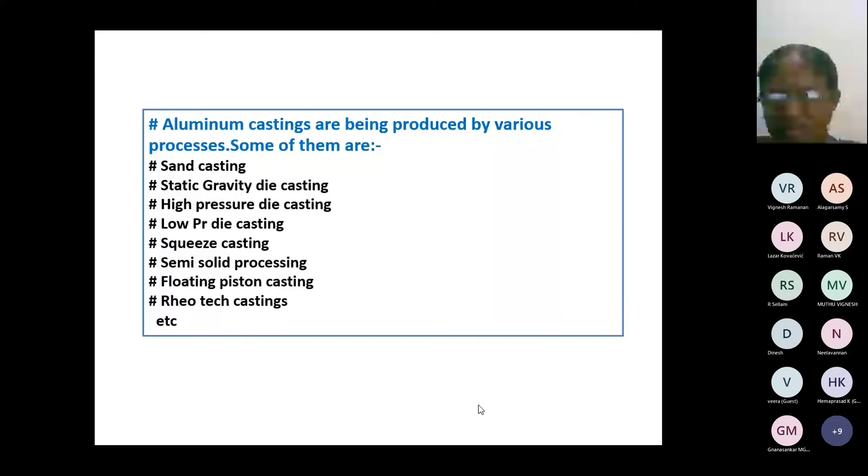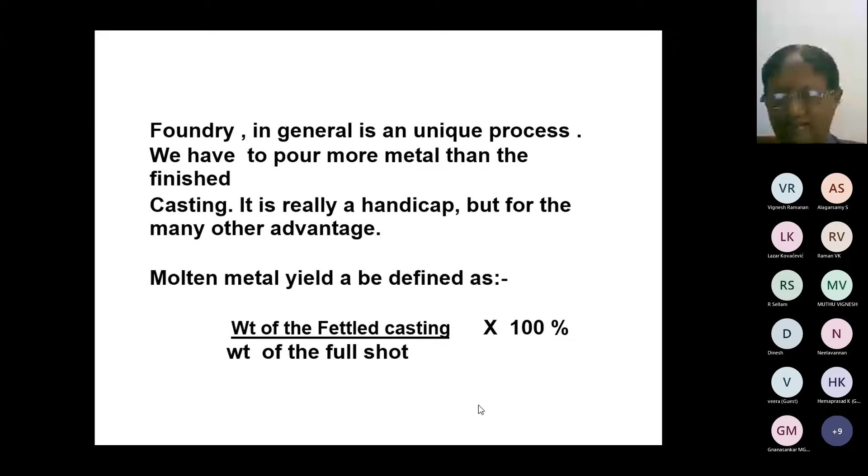Foundry in general is a unique process. We have to pour more metal than the finished casting. It is really a handicap, but for the many other advantages. Molten metal yield can be defined as the weight of the fettled casting divided by the weight of the full shot, multiplied by 100%. This is a measuring way.

In sand casting, you can get a maximum yield ranging from 30 to 40% only, and GDC from 45 to 55%, and tilting gravity can go sometimes up to 65.

Normally it is around 55, 60, and high pressure also is the same range, 60, 65 only, and low pressure is quite good, 90, 95 also possible. Squeeze casting is also more than that, and floating piston casting process, a proprietary process by Hyundai, achieved even 95% - I have seen it with my own eyes. The semi-solid process also gives about 90, 98% yield, but that is not popular in India. There is one other casting developed by General Motors USA, riserless low pressure die casting, where you get 100% yield - there is no riser at all. Such advancements are going on.

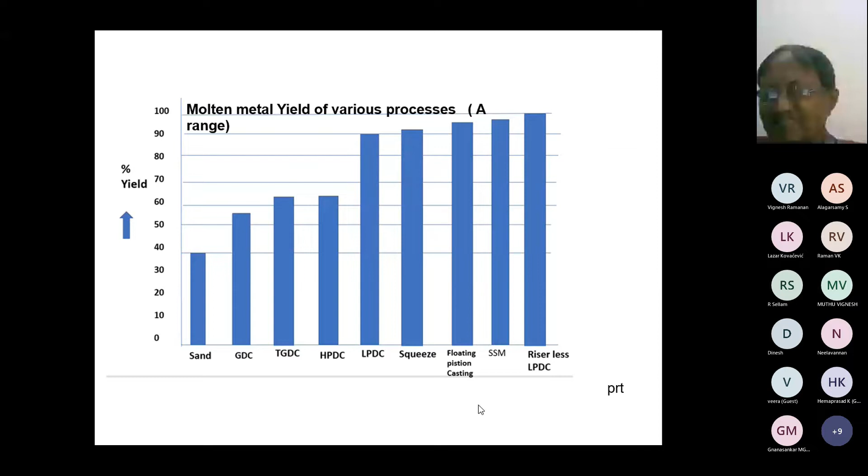In India, the most popular processes are GDC, HPDC, and tilting gravity only, and sometimes there is low pressure also. So I will take some case studies to illustrate.

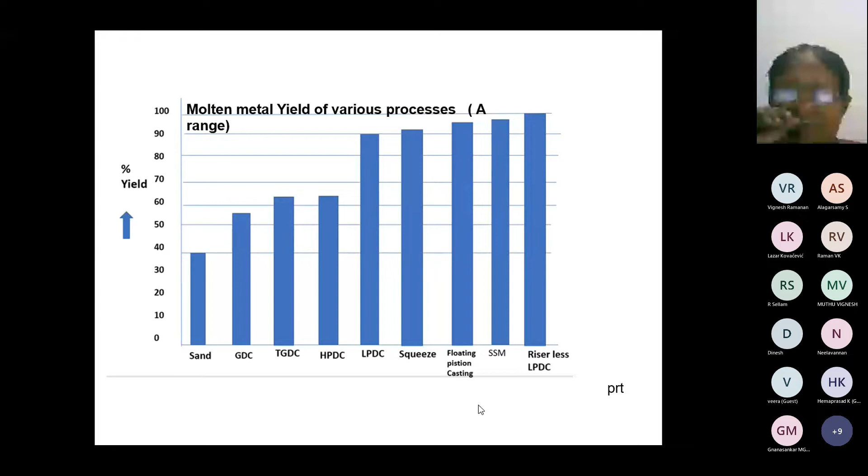What are the guidelines for improving the molten metal yield?

Attempt to avoid bottom gating and side gating as far as possible, since the risers become too cold and more volume of risers are needed for maintaining the same amount of feeding. Always try to use top gating, in which risers are always hot and the volume of risers can be a little less. Always attempt to use the tilting gravity process, in which the riser and runner are one and the same - you don't have to have a separate riser and runner, both are the same.

Attempt to provide core holes wherever possible in the casting to reduce the section thickness. Feeders could be avoided. Try to use high insulating die coating on the riser cavity to keep the risers hot with reduced volume. These are some of the guidelines which will help us reduce the amount of metal poured.

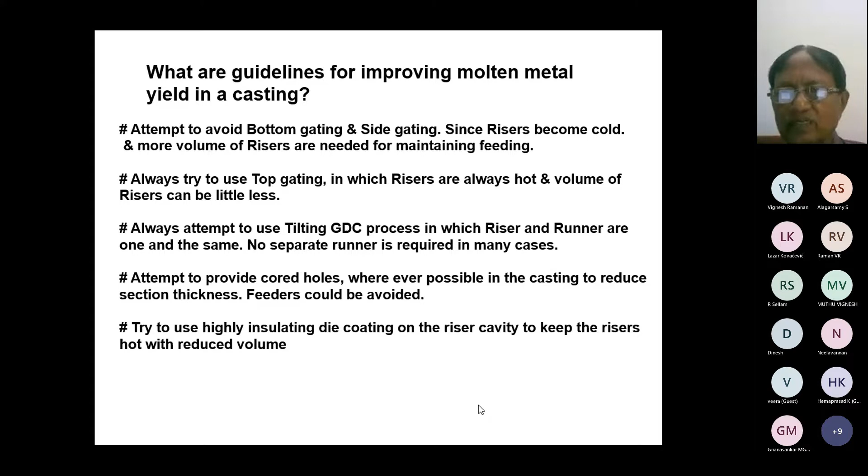Let us try to apply the guidelines and make yield improvements. I will give three case studies: one is cylinder casting, end cover casting, and lever housing casting. Of course, there are many more.

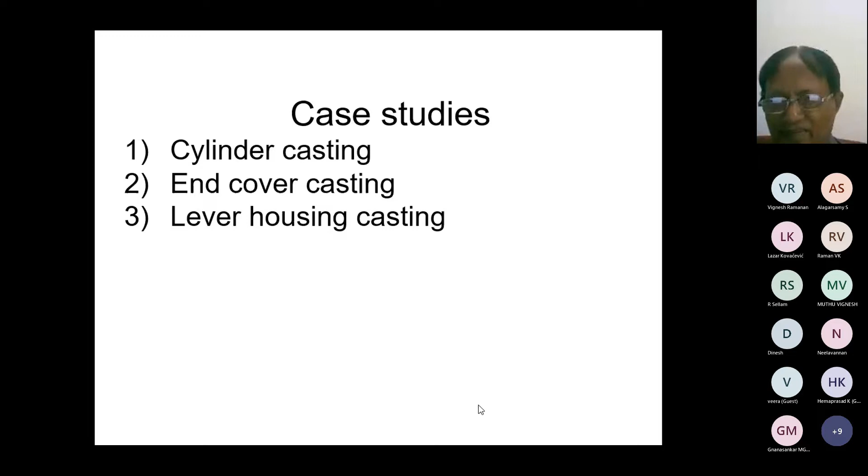Cylinder casting - this is the casting background. The shot weight was 7.2 kgs, and the fettled weight was about 3.2 kgs, and percentage yield was only 44.4%. Aluminum alloy specified is LM4, with silicon content 4 to 6%, a hypoeutectic alloy. Pressure tightness of 10 bar is mandatory. No shot blasting is specified. No aesthetic requirements. This is an under chassis casting.

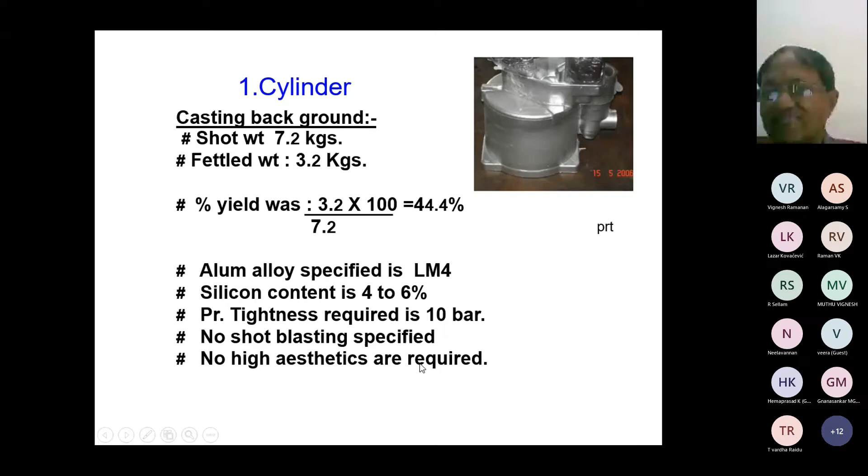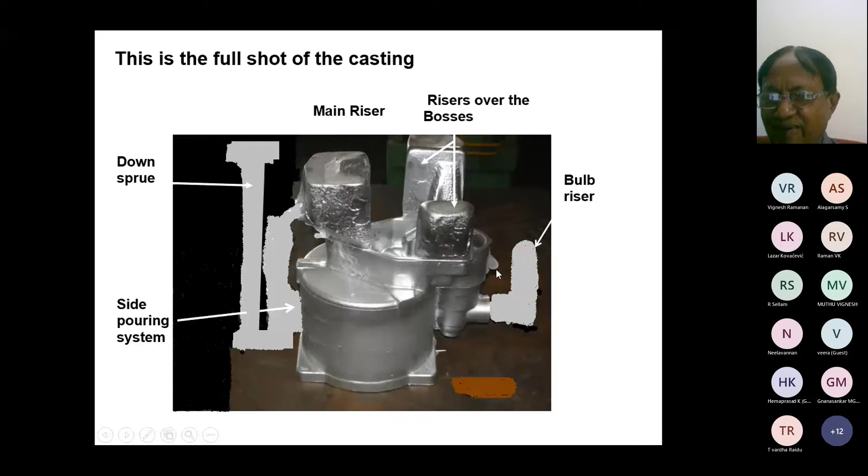A big static GDC die was made to produce these castings, and the casting quality was excellent - the die was running very well. But the yield was only 44.4%, which is very low.

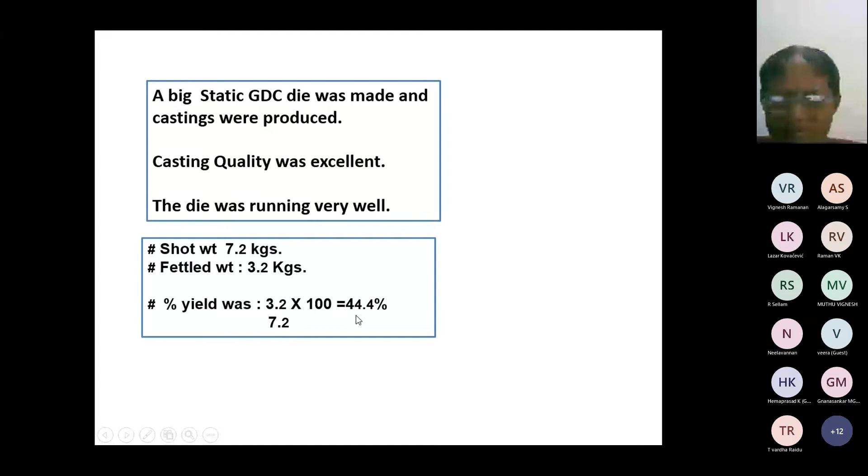This is the full shot. There are 5 risers and runners that had to be cut - you have to cut here, then here, and here, and linish and make it even. Such a lot of fettling work is also there.

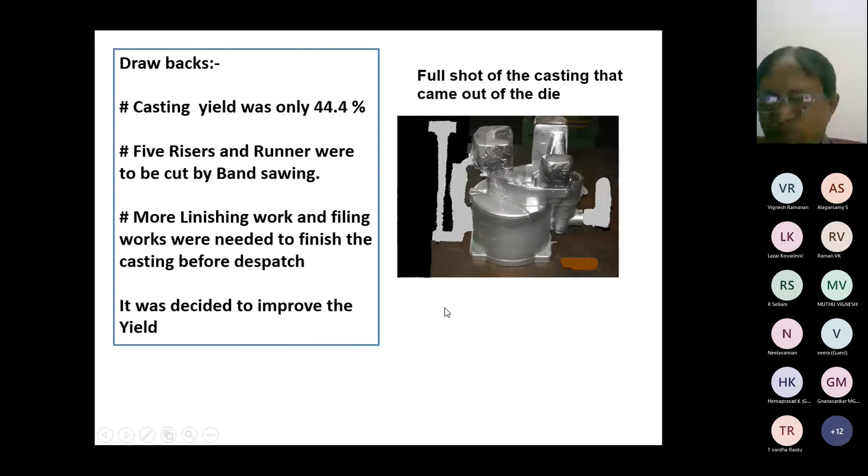It was decided to make improvements in the yield of the casting and also reduce the fettling work. We are thinking a lot. Let us see how the yield was improved in stages with the help of the guidelines - I will cite examples as we go.

First, we try to apply one rule: reduce the metal weight, or try to provide a core hole wherever required. See, this is a heavy boss of 32 mm diameter, which was tapped to M24 for being tapped on this. Supposing if you want to remove this riser, which weighs about 600 grams, we can attempt to core this and see - we did that.

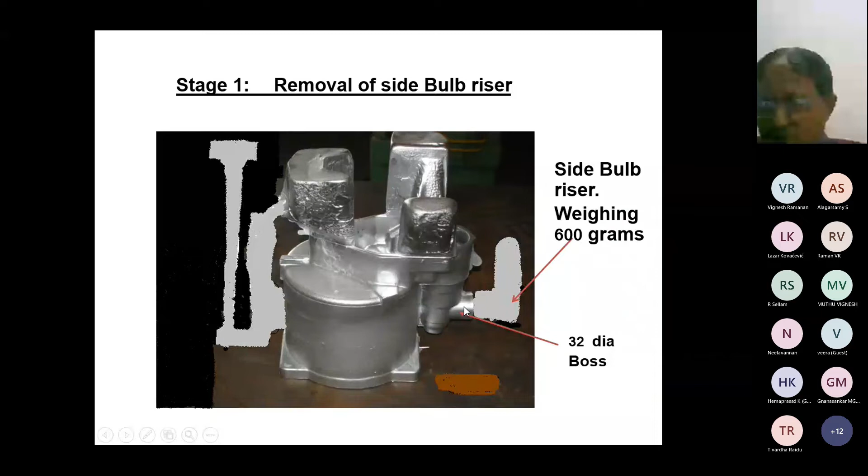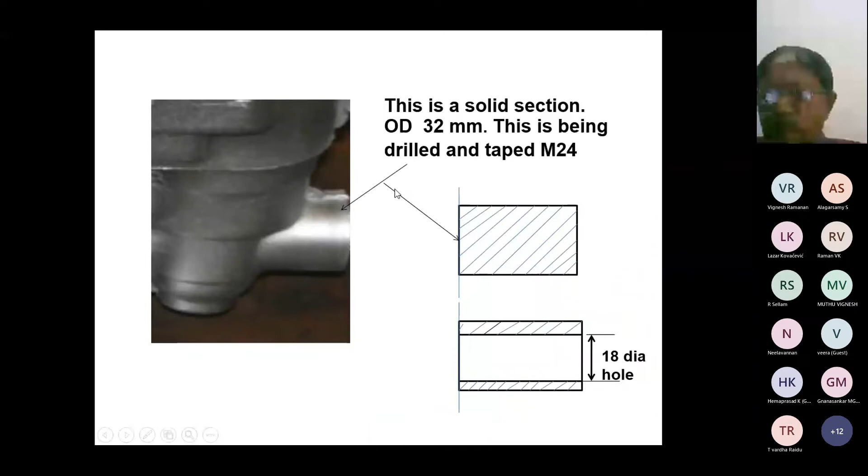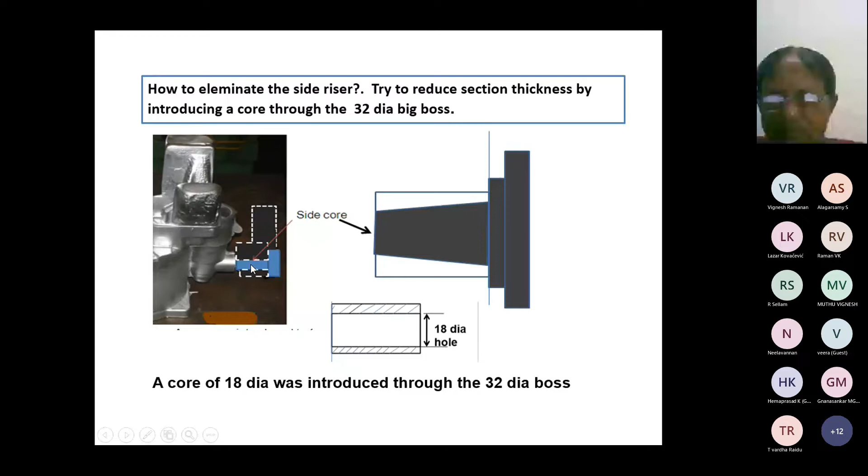We have provided a core hole of 18 mm diameter through this, say 32 mm OD. This is the die, this is the one, this is the core - we try to put it in by modifying the die. Eighteen diameter to a length of about 40 mm is quite a good material removal, and we try to pour some castings.

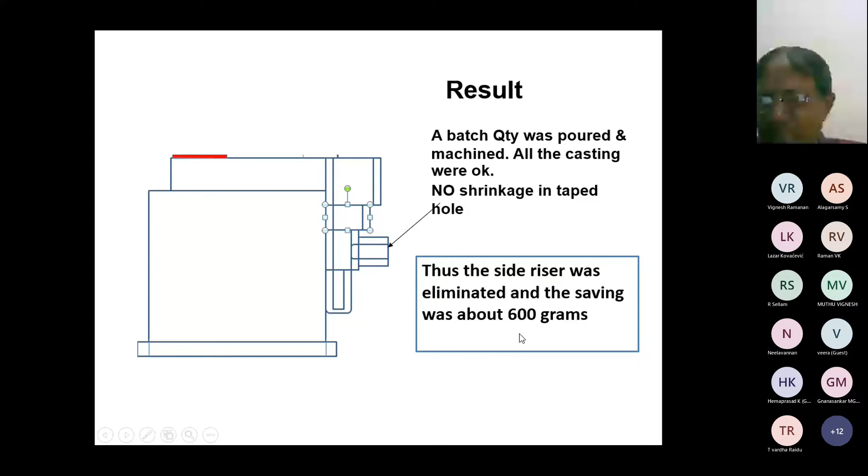A batch quantity was produced, and the castings were okay. No shrinkage was there in this hole. After machining, there was no blowhole in the thread. Thus, the side riser was eliminated by reducing the metal content, and the saving was about 600 grams. This is the first stage of improvement.

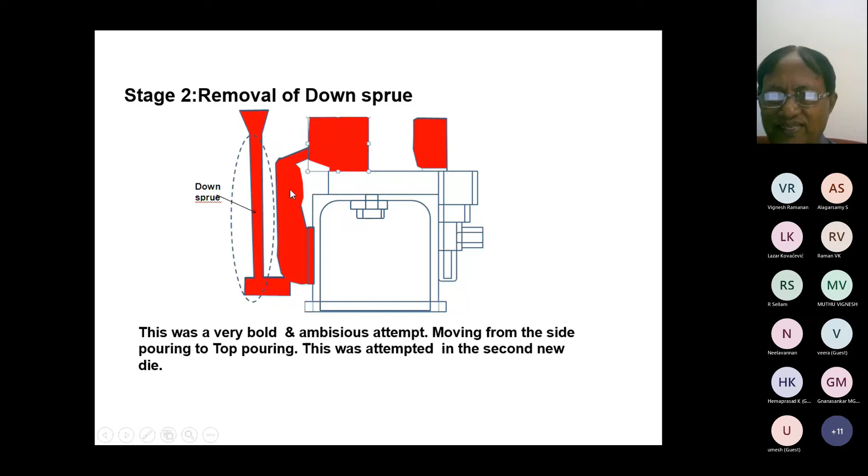The second stage is to remove the runner. This is a big chunk of material. Metal comes over there, gets depressurized, and then goes into this area. This is the ingate, wherein we try to fill the castings up. After coming to this level, the metal goes up and then slowly it goes there. So it's a very long journey.

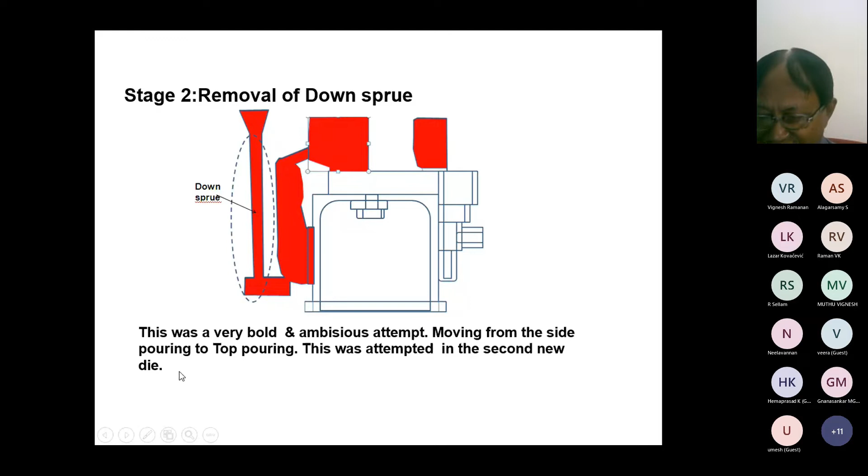This was a very bold and ambitious attempt, moving from side gating to top pouring. This was attempted in the second new die only, because we cannot modify the first die which is running. So we made a die and tried to block this out, remove this one, and try to go for a

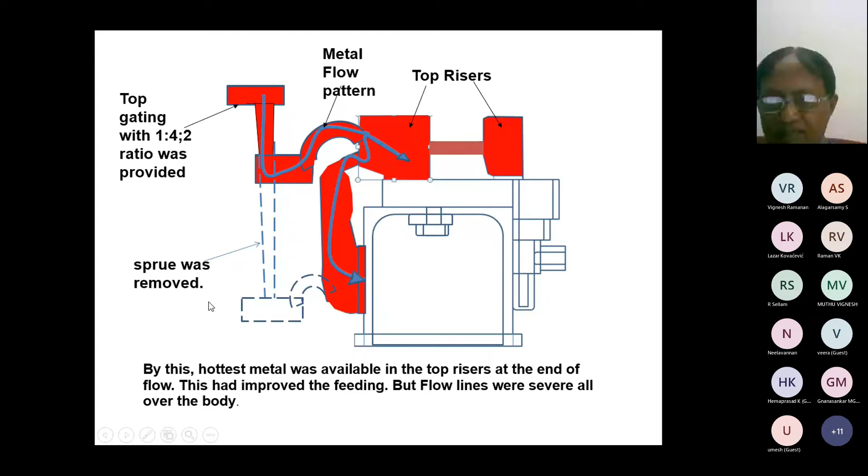gating like this, but still keeping these side risers. The metal comes here and then falls over there and falls over there. By this, very hot metal was there, and the feeding was much better. But flow lines were there everywhere. Here and here, flow lines are mixing up over there.

But aside from the flow lines, no other defect was seen. A batch quantity of about 200 numbers were produced and machined, found no problem at all. The flow lines were severe, but being an under chassis casting, it was accepted by the quality department. The metal reduction was about 1.205 kg.

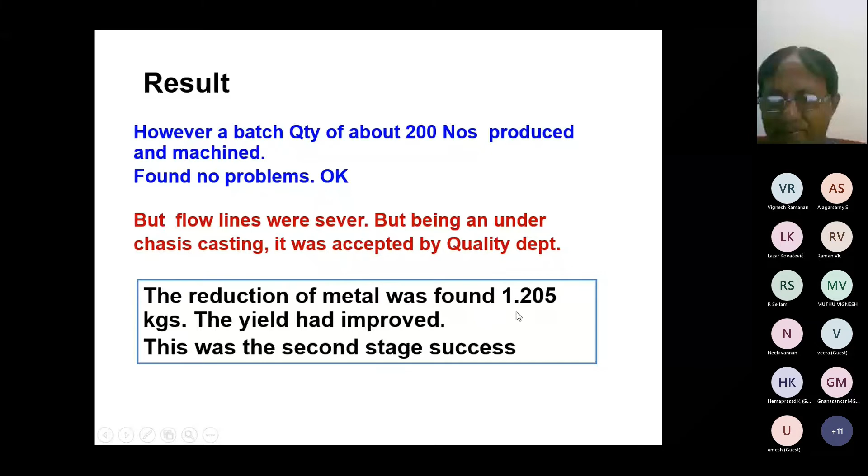How much metal was saved? About 600, another 1.8 kgs of casting had been saved in the second attempt. This was a successful attempt. Then we also went further. Another idea: why not remove this feeder also and try to go for top gating? This is really a very, very bold attempt. And we made one more die to see how it works.

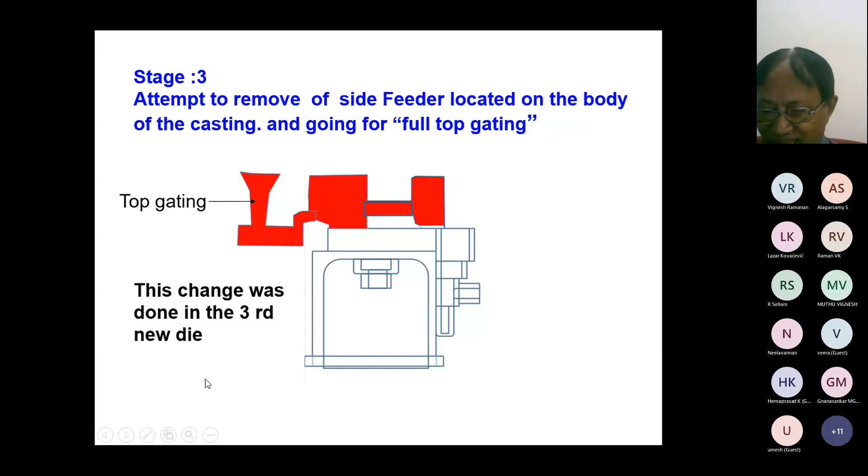So here we went for a gating ratio of 1:4:2. In the sense, the cross-sectional area at this place, say if it is 100 mm square, this will be 400 mm square, and this will be 200 mm square, so that no air will go into that one. So metal was flowing through this and falling on the top risers, and these risers have been connected so that the metal will go here. So there is no other way, there are no other risers. Only one simple cut, and we can remove the risers.

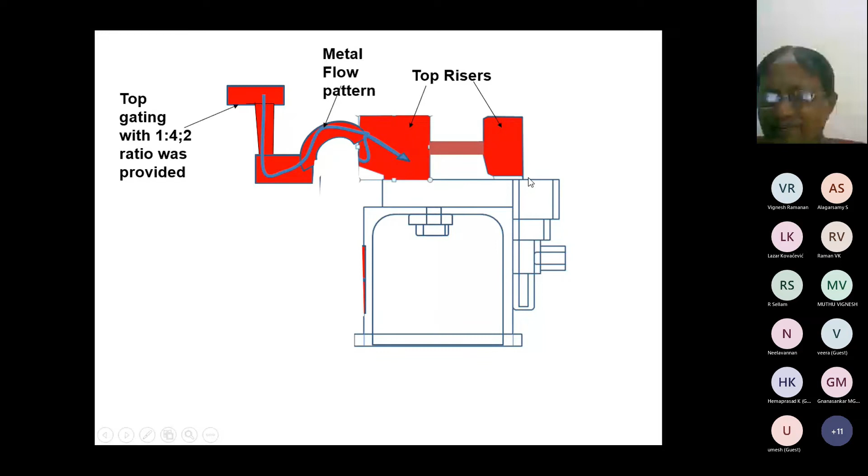But a lot of problems we encountered. There are 3 problems we saw in this attempt. Very severe flow lines, it was accepted by quality on our request. The movement of the big bottom core was getting jammed because when the metal falls to a height of about 150 mm, this 120, another 30, it gains a velocity that is very high.

The velocity can be calculated as equal to the square root of 2gh. It works out to more than 1.5 meters, nearly 1.8 meters per second. By this, this is the shank, this is the bore, this is the bore, and the metal straight away goes into that one and makes the die not movable at all.

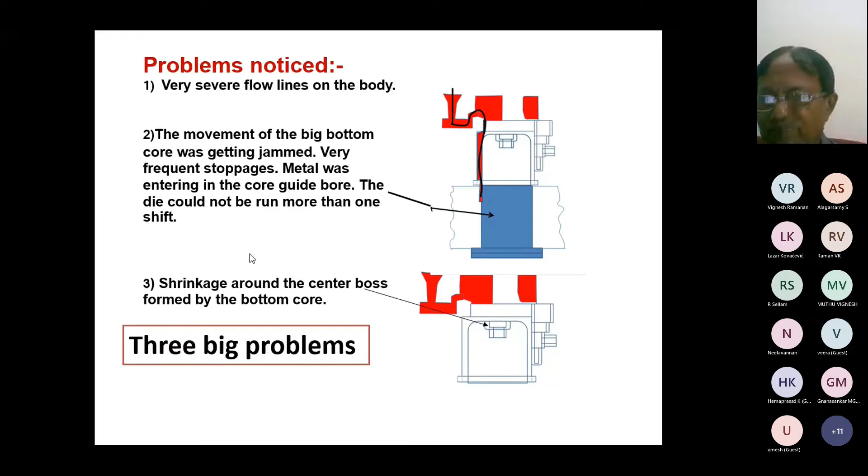Then another problem we encountered was shrinkage in this area. So unless we solve these two problems, the project will be held up. So first we wanted to solve this metal entry problem. How to do that?

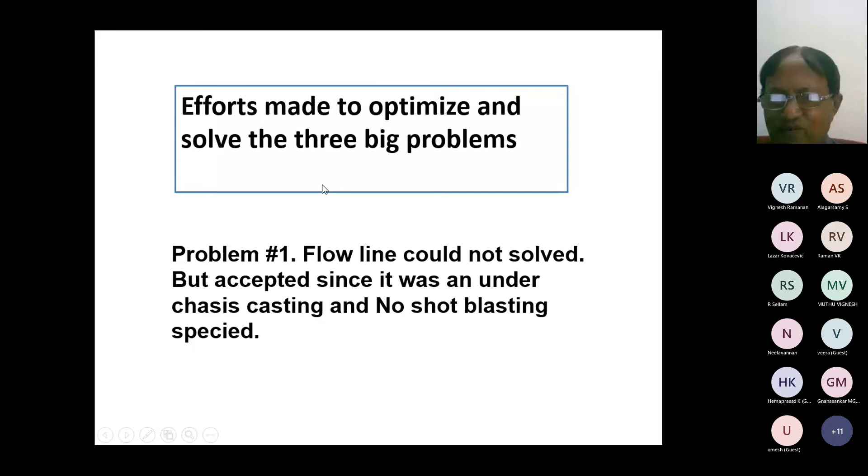This I also had considered. No, shot blasting is not required, meaning we are able to get away with the flow lines. Though the flow lines were severe, and after shot blasting, these flow lines will sometimes show up some surface defects, we are lucky. No shot blasting was asked by the customer for this casting. So even with the severe flow lines, they were able to get away with it.

Now, the gap is hardly about 0.3 mm per side. Unless we have 0.3 mm, the core will not go down. It's a very big core of 120 mm diameter, such a big core. A very long core of about, say, some 250 mm will be there, this height.

And during production, when the metal comes at a very high speed on this one, see, this is the metal entry, then after about 4 hours it gets jammed. Then we used to remove the core, remove this material, apply Moly coat also, and then assemble. It will work for only 4 hours. Afterwards, again the metal will go inside and we have to remove it and then remove it again.

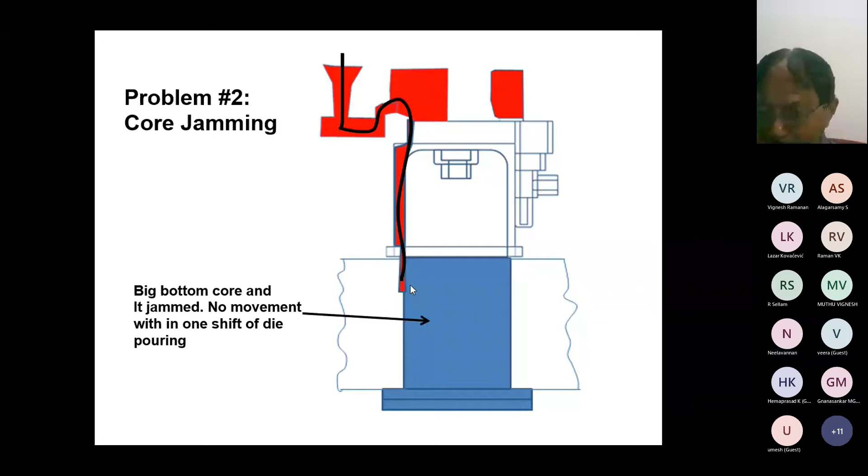So what we made is how to solve this problem on this one. This is a hollow core and this is the shank.

Normally, the shank diameter is only 2mm bigger than the core bottommost diameter of the casting, and this 0.3mm is mandatory for free movement. If it is not there, the core will not drop because the core temperature will go up to 270 degrees by the time it expands and goes in. And if it's 0.1, again the core jams. It's a very critical position, how to sort it out.

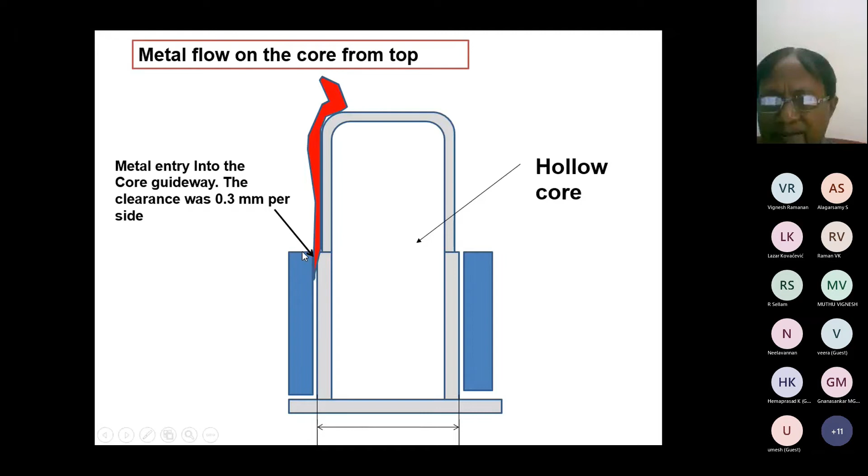So instead of metal going straight away into this area, why not we make it diverted by 90 degrees? So we made a core.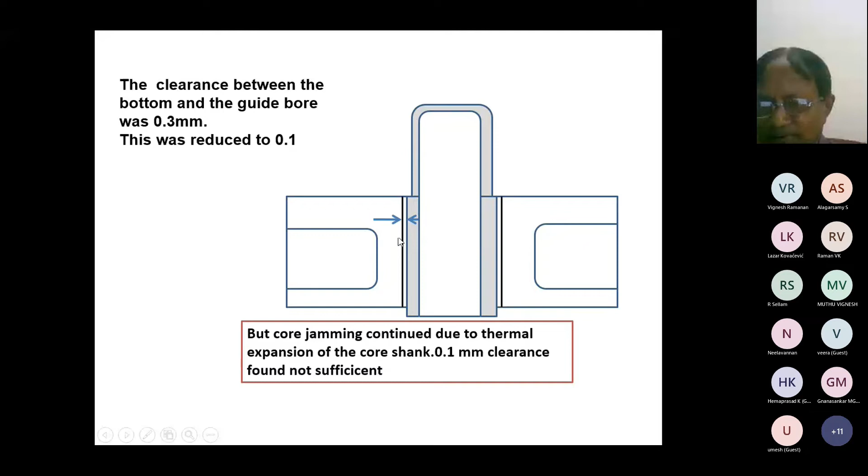Then we tried to make the clearance by only 0.1. That did not work - again the core jammed, but no metal entry. The problem is you can't operate it because after 2 to 3 hours, again due to core expansion, the core jammed. So 0.1 clearance did not work in this area, although the metal has not gone in - it has not worked well.

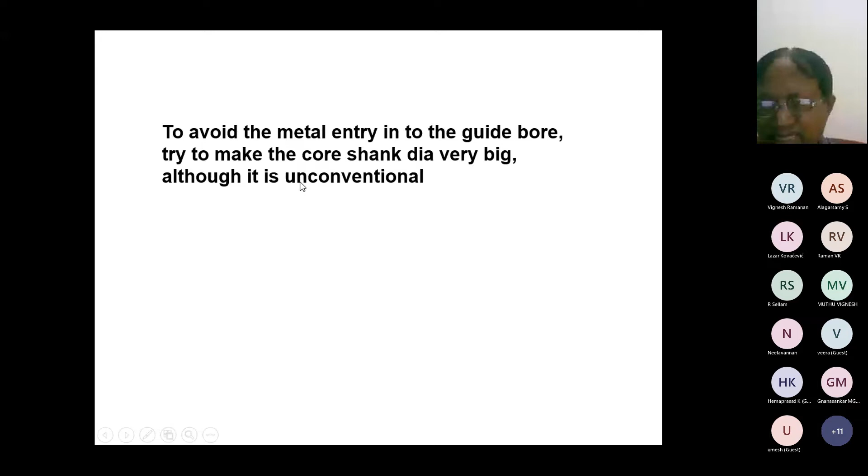So what we thought is, why not make the core shank bigger, like this - something new, which is normally not done. This is an unconventional way of making the die.

We have made this core shank from the previous diameter to 30mm more. So when the metal comes over here, it will not go here - it will get the pressure and get diverted by about 90 degrees. By that, the speed is reduced.

Surprisingly, we found there is no metal entry at all - all over the place it goes like that. This is a very great idea, first time tried, but the diameter is very unconventional. Normally, instead of 2mm, we made it 30mm. There was no metal entry, there was no core jamming.

But there was another problem. If the core shank is more, the casting goes down along with that.

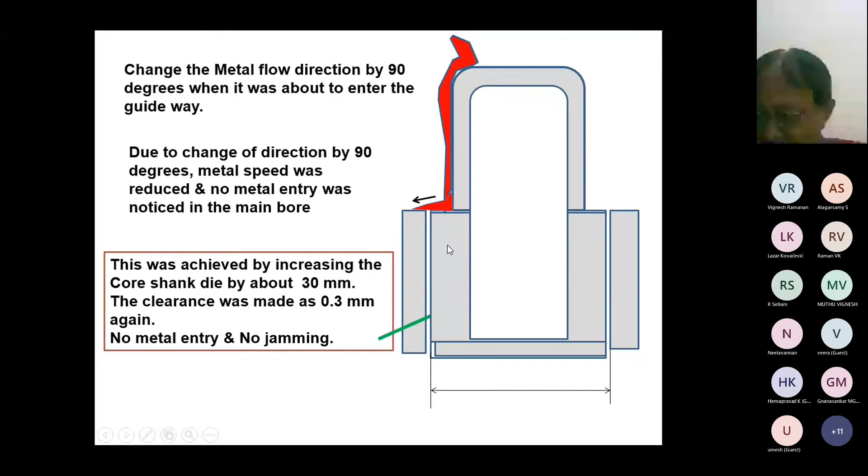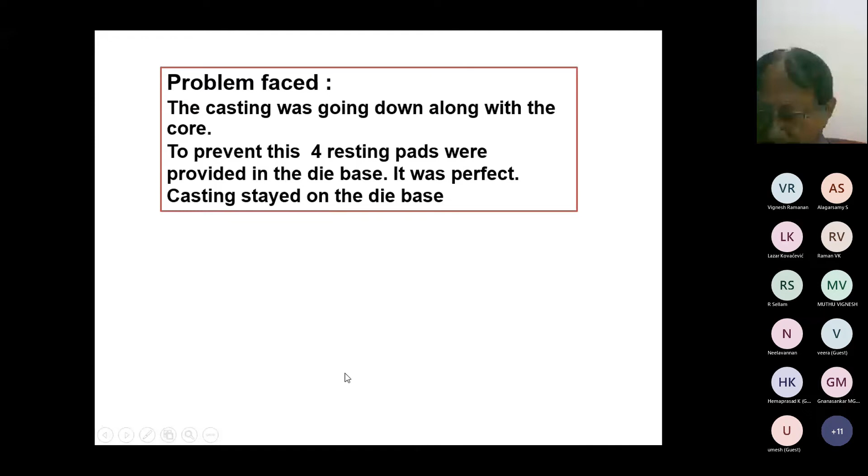So we have provided 4 resting pads on the die base like this. This is the casting bottom, and this is the core shank, the cross-section area where the core moves down. We have provided 4 pads as a bearing area so that the casting is able to rest on this one and the core goes down.

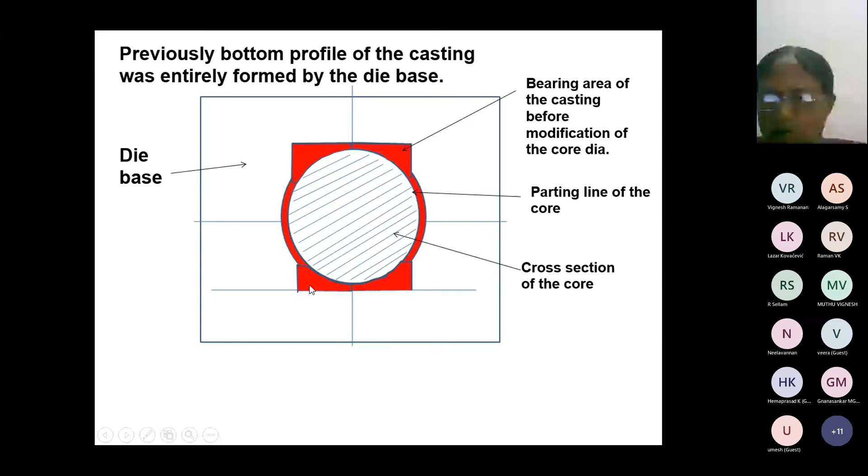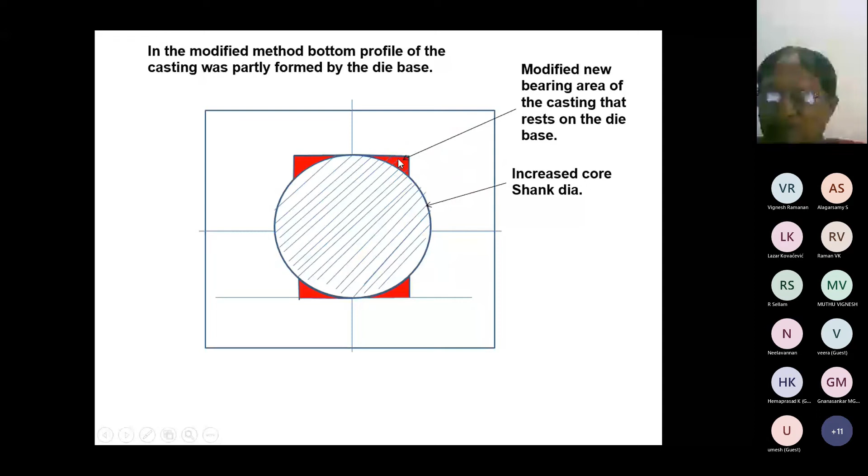This is the core shank, which is about 30mm more. These portions are formed by the die base itself, so it is resting on this and the core goes down. This was very much successful and we found the casting is working well. All the mechanical problems have been sorted out.

There is one more, the last problem - the shrinkage on the center boss was still remaining. An attempt was made to solve the shrinkage problem by cooling methods.

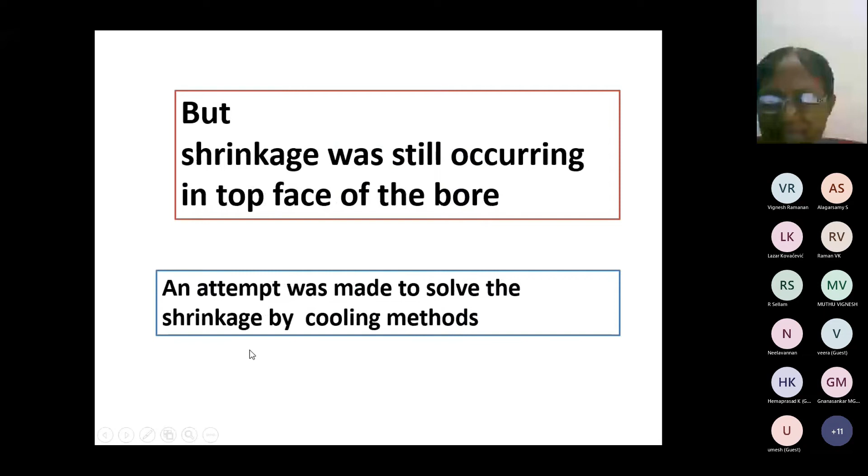So this being a hollow core, we have admitted air inside. These are all air hollow core, and these are all copper chills with a taper. This one, and try to solve the problem. Shrinkage at the center boss was totally solved, but there was another problem, which is something different.

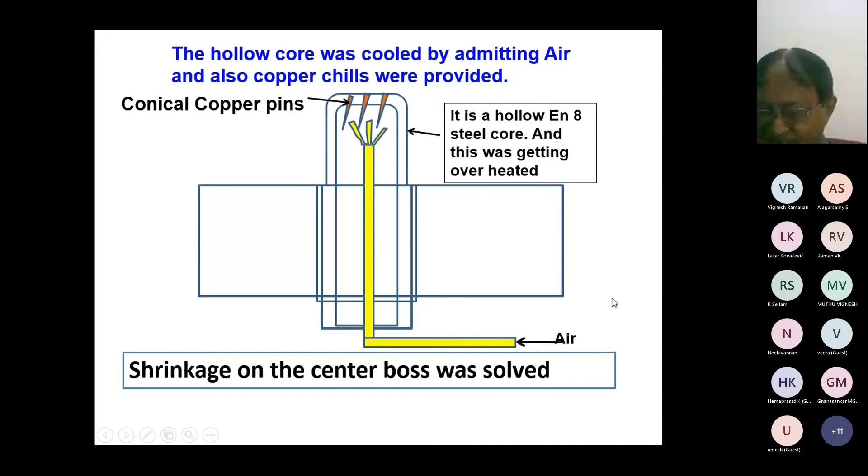Because when the air goes in and then comes back, there was a compressor and a lot of noise was generated, and also some oil spillages in the compressor air. All the die space was getting so dirty, and there was a lot of objection from the shop floor - the whole shop was noisy. One compressor itself is exclusively required for this cooling. Lot of complaints from the workmen due to the places getting shabby.

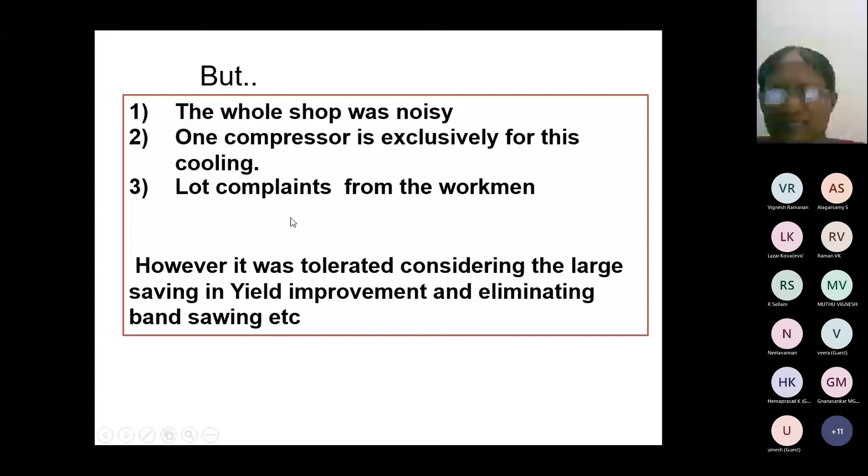However, it was tolerated by considering about nearly 2 kilograms of material saving, yield improvement, eliminating band sawing, etc., for some more time. But people cannot tolerate for a very long time. 3 years passed without any more changes in the die.

We made a fourth die. The shop floor engineers do not want to give it up - they want to eliminate the noise by avoiding air cooling. How? They formed a QC circle and with the senior die casters started doing analysis - why the metal is entering and how to sort it out without these problems.

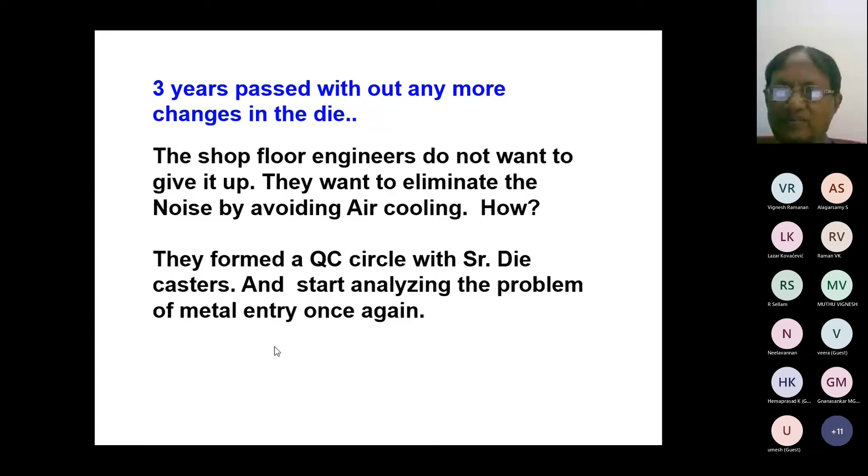This is a fishbone analysis - man, machine, material, and process, all of you know very well. Heat conduction and the hollow core - the hollow core is also a reason because it contains air, and air is a bad conductor of heat. Why not we make it solid? Then no air cooling is needed in the bottom core.

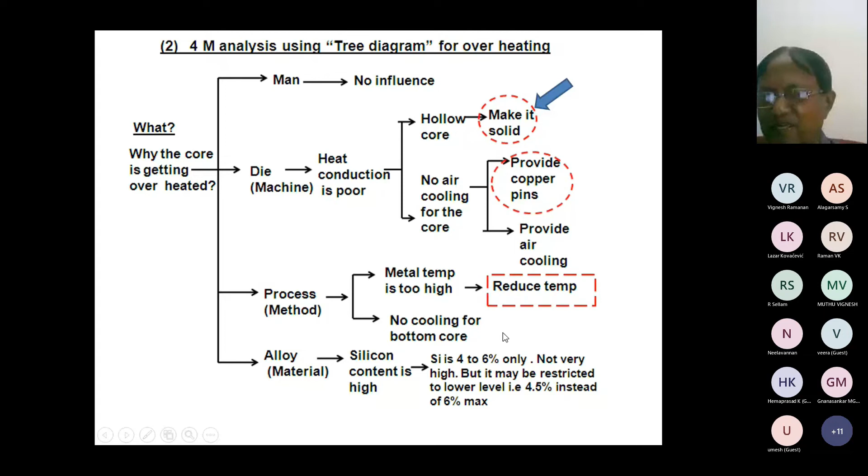Then we made a copper chills. This idea solved the problem of shrinkage, but again it gave problems of noise and all that. Metal temperature was too high - then we brought it down to 720, something like that, but that makes no difference. Silicon is only 4 to 6%, there cannot be a change. So boldly we want to make a solid core and try a bigger bottom core.

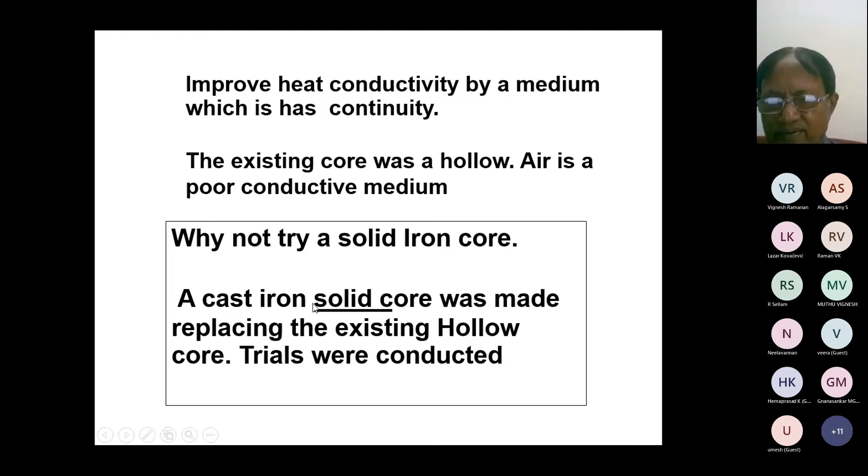Then instead of steel, we made this cast iron solid core, replacing the existing hollow core, and trials were conducted. To our surprise, we replaced the hollow core with a solid one - see, big solid core.

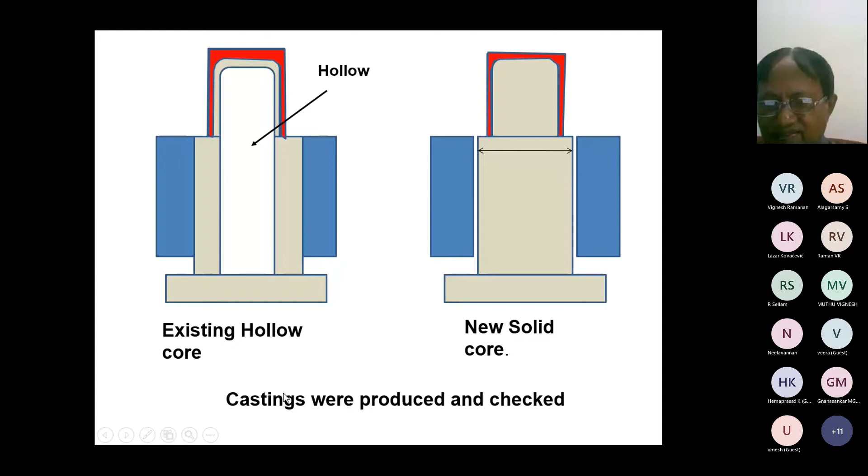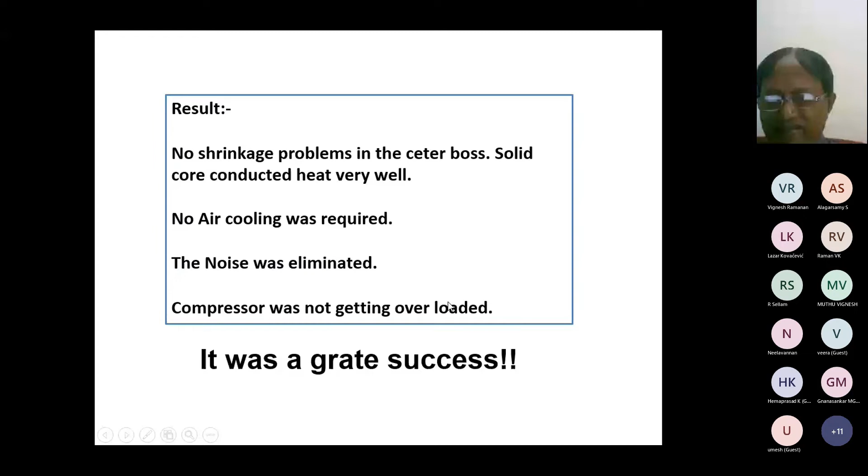Castings were produced and checked. To our surprise, there was no shrinkage at all in the center boss, and the solid core was conducting heat very well. No problem at all, no air cooling was necessary. The noise was totally eliminated and the compressor was not getting overloaded. It was a very great success for us.

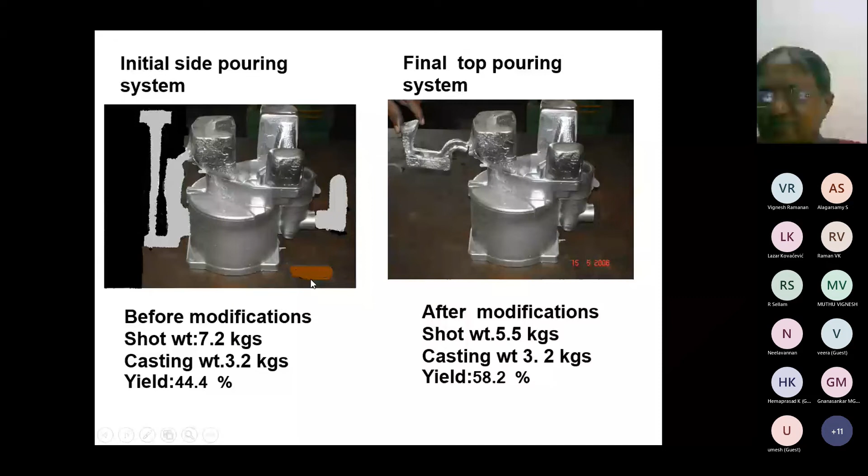From 7.2 to 5.5 kgs, the yield has gone from 44 to 62%. Let us work out the savings.

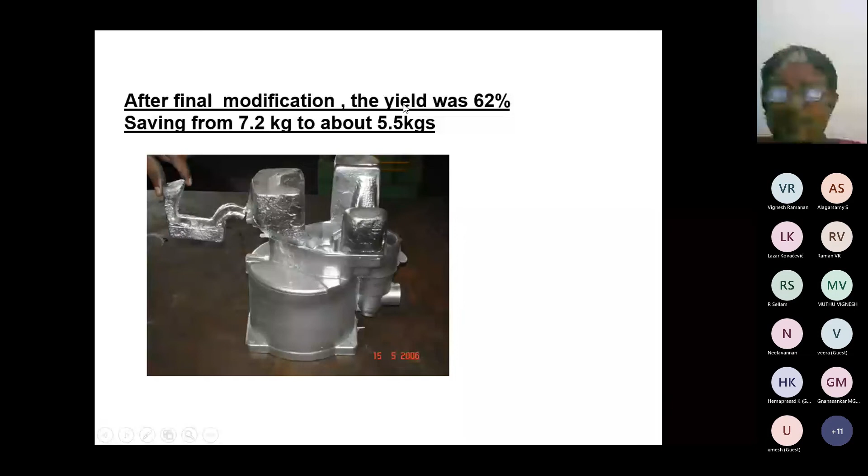The metal saving was 1.7 kg per casting, at 10,000 numbers per month. Over 12 months, that's 204 tons of metal you don't have to buy at all. At that time, the metal price was about 110 rupees per kilo, or even 100 rupees per kilo. Savings by way of casting weight reduction of 25 grams by putting a core hole was about 3 tons of material removed over the years.

Band sawing was totally eliminated, and the top risers have been cut by rotary sawing. It took us, you may or may not believe, 7 long years, with new ideas subsequently improving one after another. This was a very good experience for us.

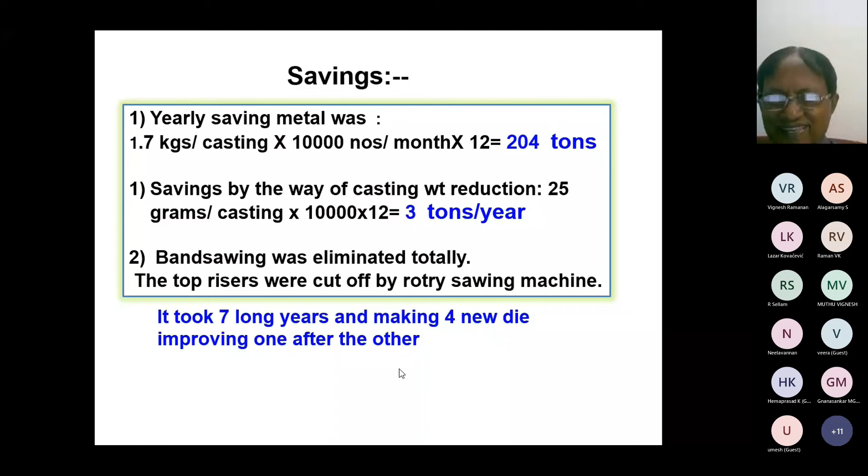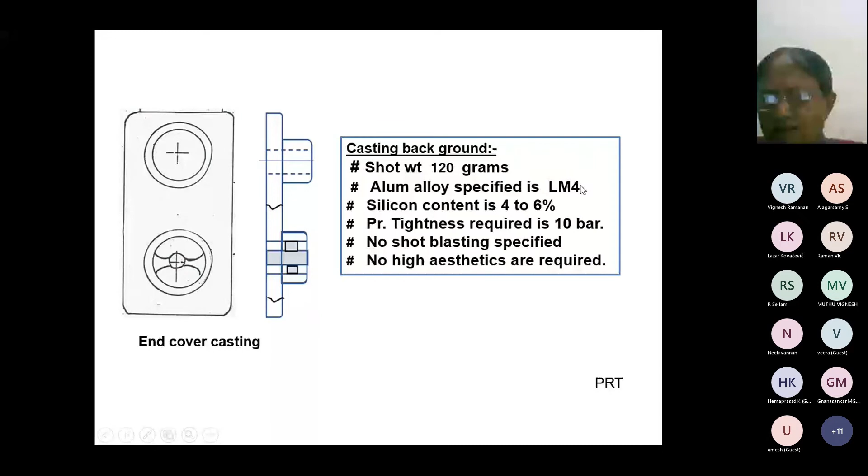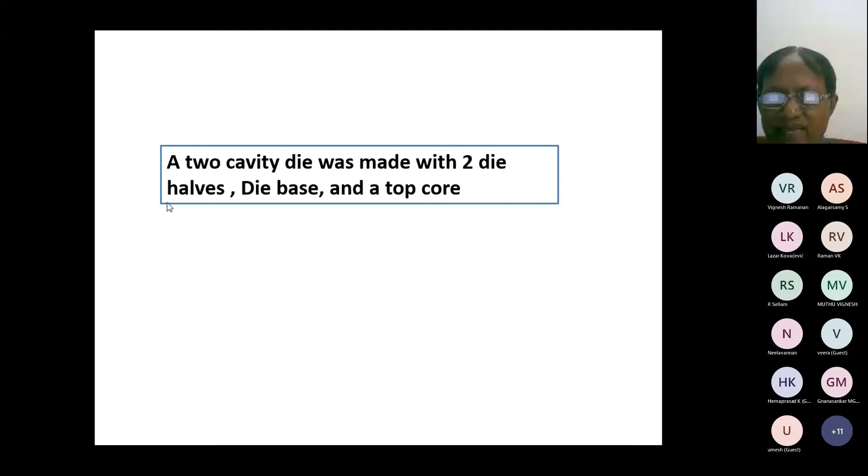This is the casting to be made. So we made a two cavity die with two die halves, a die base, and the top core. This is the die base with the cavity sunk in, these are formed by the top cores, and these are the die half which moves back and forth.

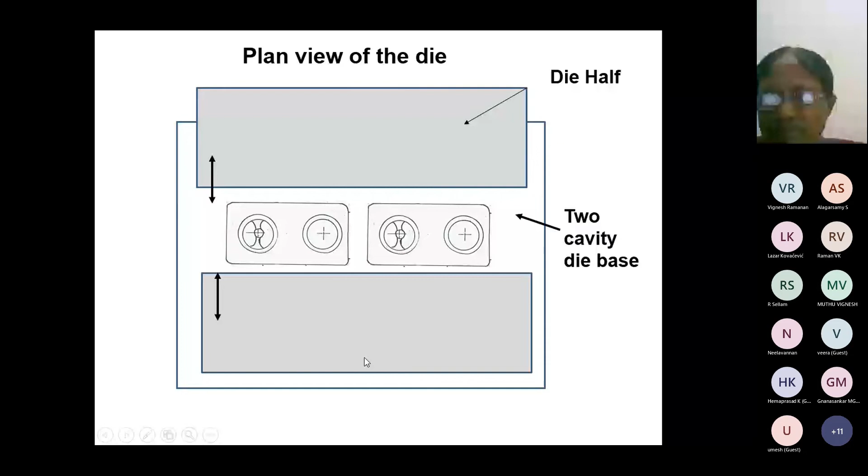These are all two top cores, manually lifted, each weighing about 5 kilos, and the casting has got to be removed - there is no ejection at all. The operator has got to lift the core every time, which is about 200 degrees centigrade, then lever the casting out and take it out.

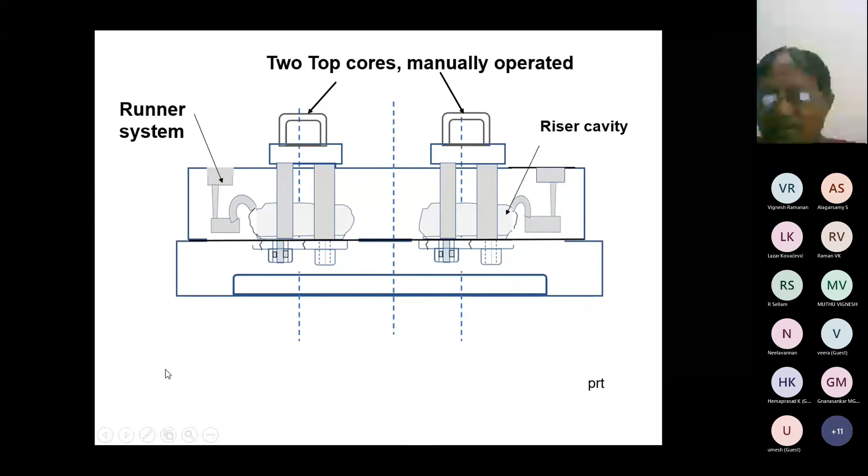Shot weight was 320 grams and filled weight only 120 grams. Percentage yield is only 37%, very, very low. On top of it, very difficult to hold this casting and saw it. We had a lot of accidents also.

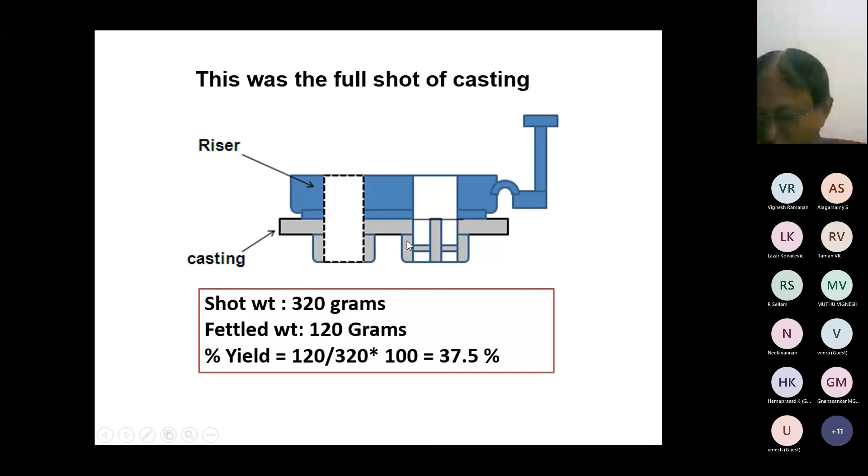One of the people cut his hands also - very, very difficult to fettle the casting. So fettling also has to be considered when you make a die.

What are the problems in summary? The casting yield was only 37.5%. The top core operation was very, very tiresome, and the casting removal by levering was also very hard and took lots of time. Hourly output was only 15 numbers per hour. Unable to cut the big riser by band sawing and sawing machines.

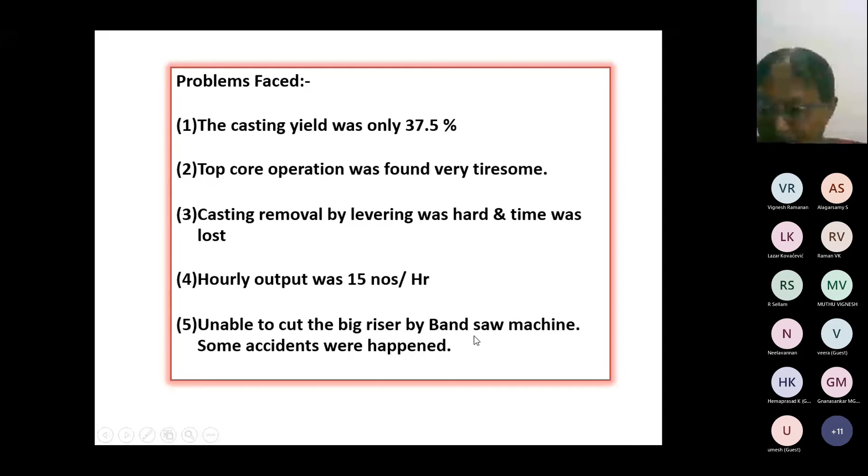We have made a lot of castings. You may not believe it, but with a lot of heartpain, we had to remelt 2,000 of these castings, which probably nobody else would do. Then we wanted to make a new die, so a new die was designed with the side pouring system.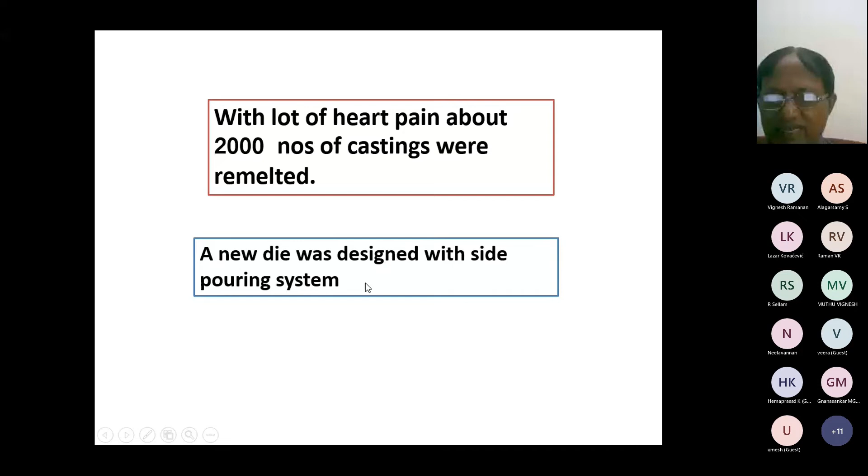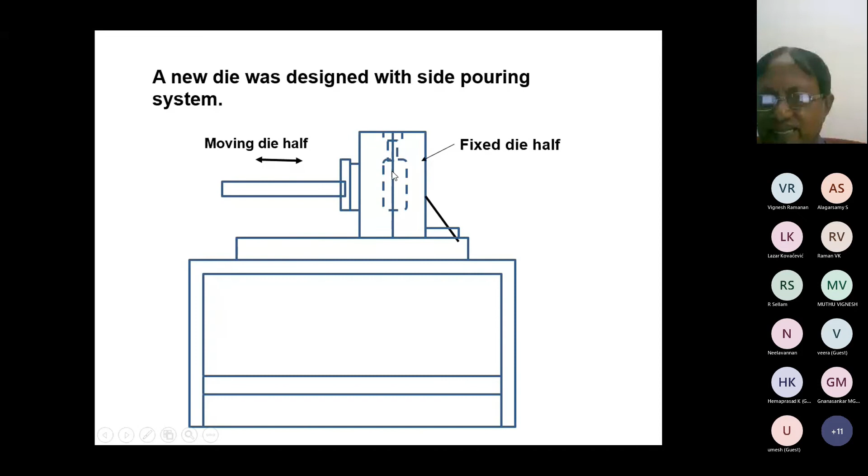Something different. This is the die. One is a fixed die, wherein you make the cavity, and this is a moving die. This one die half is a simple die stand. This is the gating system, this is the casting, this is the top riser, this is the cavity, and also the side runner.

The casting was coming out very well. This is the full shot of the casting. Shot weight was 220 grams, and fettled weight was 120 grams, and yield has gone up very well from 37.5% to 54.5%. Sawing also quite easy, you can just cut it off on this one.

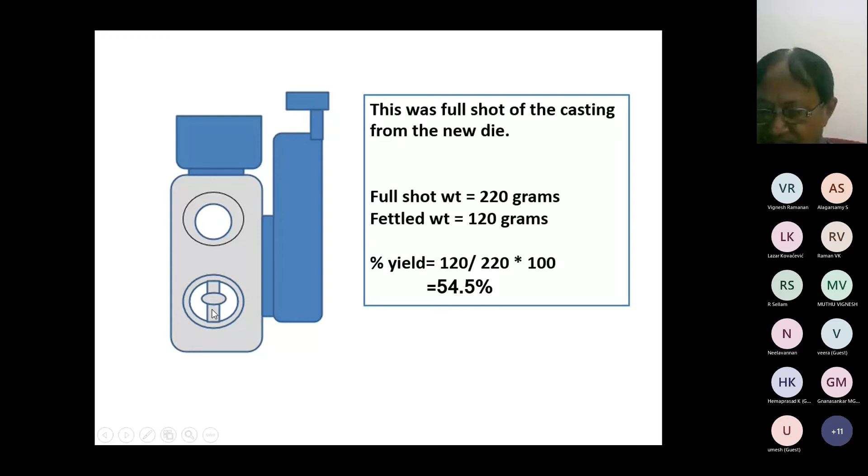This was not without problems. We had some problems in this area. Some shrinkage came because this boss is isolated, because this is a different one in these bosses. What we did, we put some long copper chills with the core, with air vents at both ends. This is a long one.

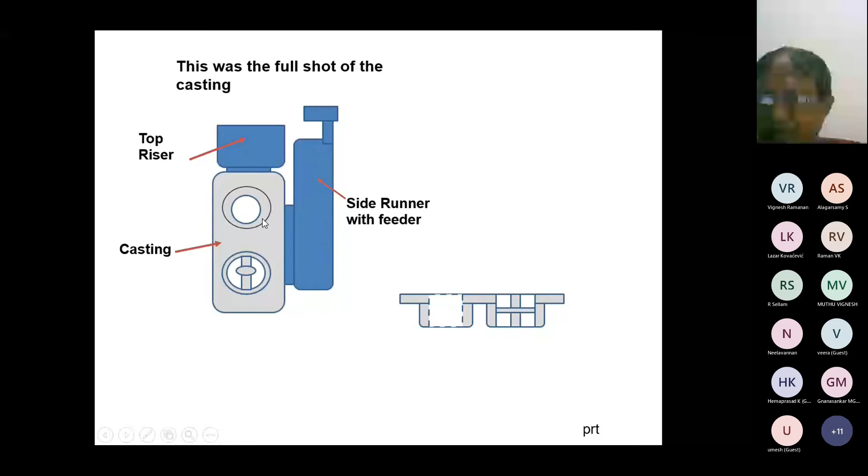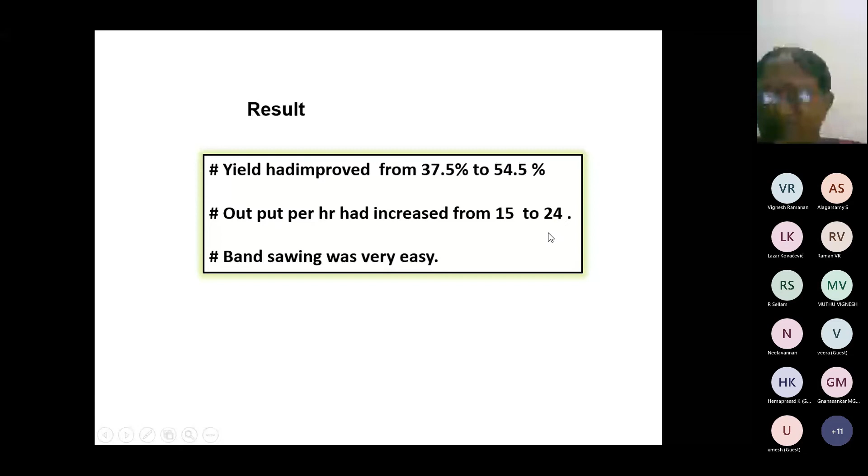This copper chill and the air vent solved the problem very well. This is not much of a problem because this is nearer to the top risers, and this was a great success for us. Yield has improved from 37.5% to 54.5%, and output has gone up from 15 to 24 numbers per hour. 24 into 2 castings, so 48 castings per hour we are able to get. Band sawing was very, very easy.

This was one success story. This is another casting, lever housing. This is also a very good casting. This is the shape, these housings and levers. The total weight of the casting is 0.72 kgs, and the alloy is again LM4. This is the casting, this is a rib, and this is the collar portion.

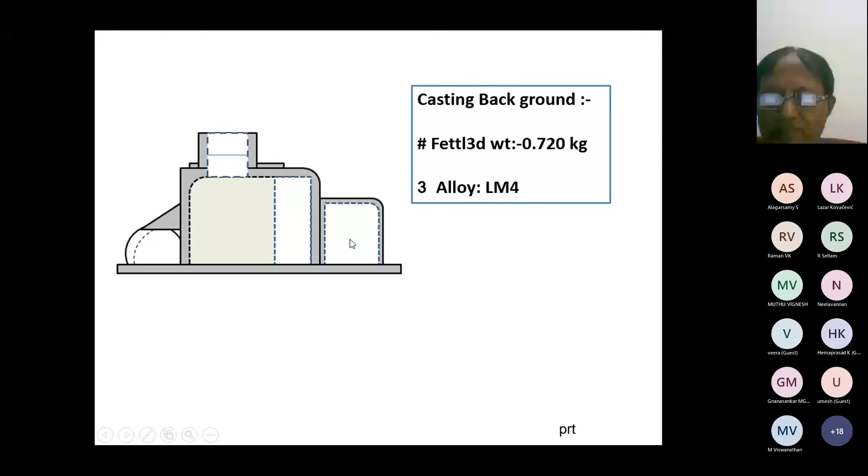A die was made earlier. This is the die construction, 2 die halves, and this is a big top core to make this bore. To make this profile, the collar profile, we have to make a top core, and this is a very heavy core. It was pulled by lever and then taken out. This bottom core forms the 50 dia bore, and this die housing will move this way and that way.

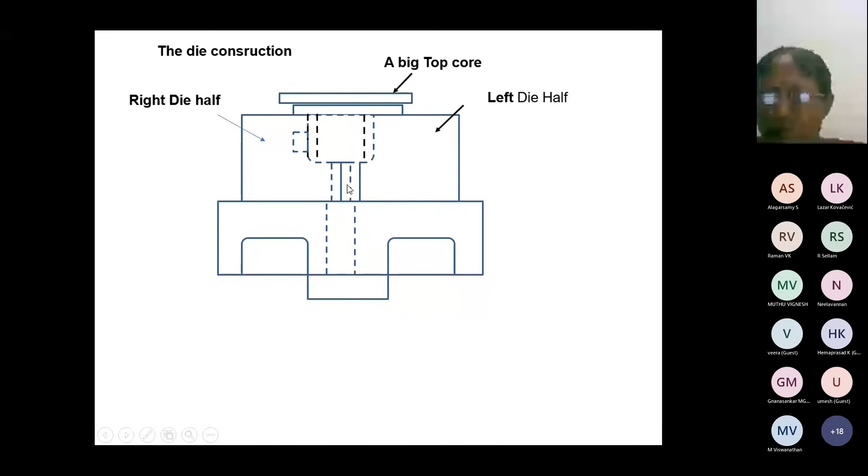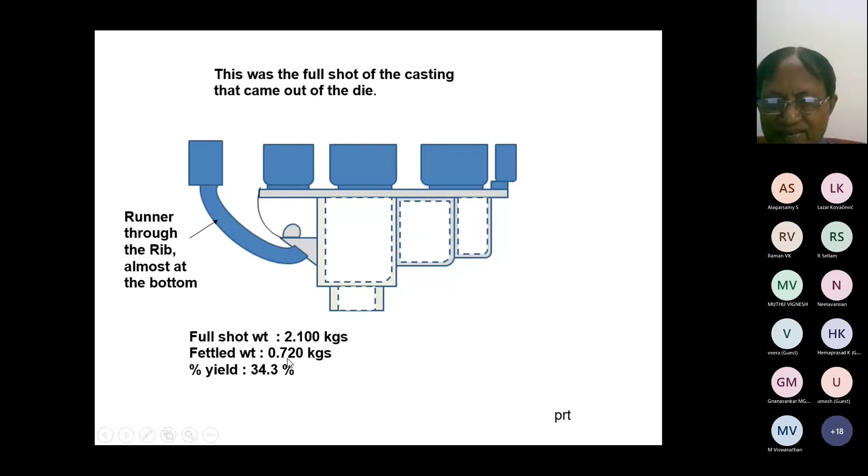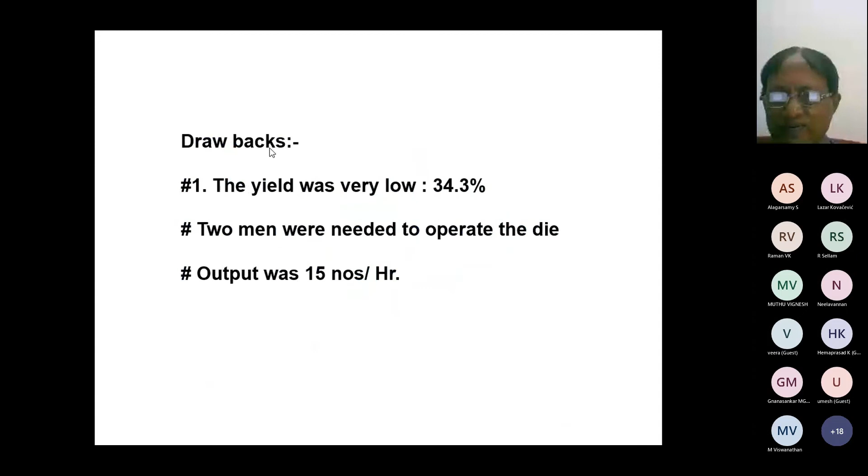The full shot weight was only 2 kg and the fettled weight is 0.72 kg, and the yield is as low as 34.3%. We require 2 operators also to operate this die, so management is not very happy. We have to make improvements, so a bold approach was made.

Why not we make a die upside down like this? This is the die, this is the casting. These two are joined as one bottom core, this one die - I didn't make the right drawing. And this is the top riser again as ever. We go for top pouring with a 1:4:2 ratio and try to fill the casting.

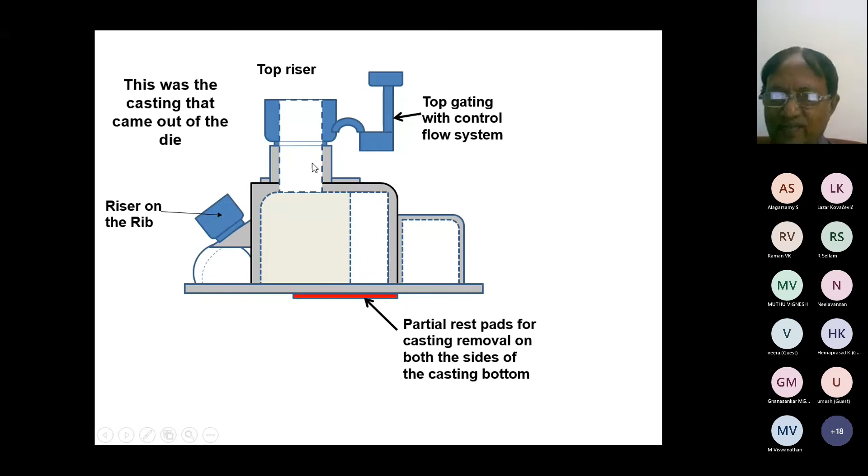For the rib portion, we have provided a bulb riser to hold these ones, and to hold the casting on the base, we have provided this one because the core profile was totally different - it's a triangle shape with this thing. These two pads served as a resting point for the casting when the core drops down. We found this die was working very well.

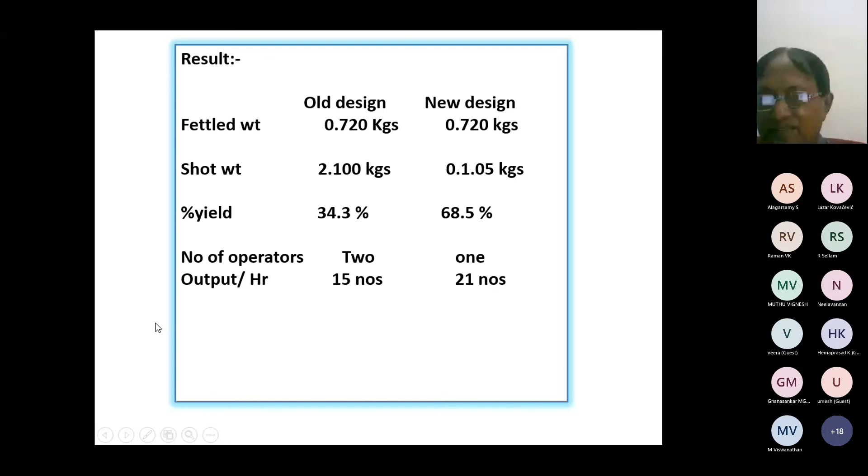And the output also has gone from 15 to 21 numbers per hour. It's a great success, such a top gating, as I said, and so on. This is the end of this presentation, thanks a lot. Any questions? I will try to answer.

Yes. Sir, good afternoon, sir. I am Neelan from SNAM Alloy, sir. Yes, sir.

Sir, I have one query. In the production of aluminum metal matrix composite through the stir casting process, what are the ways or methods available to get good wettability of the particulate, to get even distribution in the aluminum matrix, sir?

Actually, I should say very honestly, I don't have any knowledge on this metal matrix composite. I don't know at all, so I am not competent enough to answer that question. Sorry, metal matrix is a new technology. Thank you so much, sir.

Sir, this is Babu from Asian Metals, Bangalore. Do you have any case study for tilting GDC like this? Please repeat the question, sir. Yes, sir, do you have any case study for tilting GDC?

Yes, I have, but today I could not present it. In fact, what happened is we are using most of the parts in tilting GDC. So that will be very much helpful. I had planned it, but due to some time constraints I could not make the slides. But tilting GDC is my favorite, all the time.